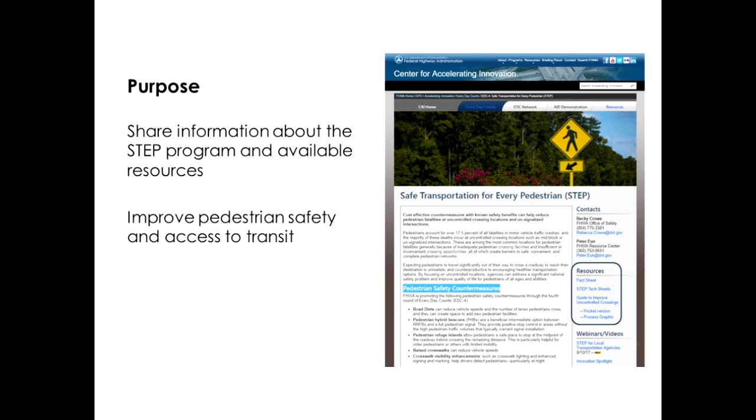All right, and with that, I'm going to go ahead and get started to provide an overview about what we do at the National Aging and Disability Transportation Center. A little bit about the NADTC. We are a technical assistance center, and we're funded by the Federal Transit Administration.

We're co-administered by Easter Seals and the National Association of Area Agencies on Aging. The center was established in 2015, so we've been active for 3 years now. We offer training, resources, and publications. We have a toll-free hotline and information and referral. Our primary audience at NADTC includes older adults, people with disabilities, caregivers, and professionals such as yourself who serve older adults and people with disabilities.

Particular focus areas for us include public and private transportation, ADA accessibility, community livability, pedestrian safety, travel training, and driver transition.

You can find a variety of resources on the NADTC website, which is www.nadtc.org, and we have a number of pedestrian topics. If you go to the website, in the search box you can type in pedestrian, and the type of things that will come up will be our guide on accessible pathways. We have a number of walkability audits and transit assessments, a driver and pedestrian guide. We also have archived Twitter chats that we've done in the past, and I'll talk about that a little bit later in my presentation. And we also have a guide on snow removal and wayfinding.

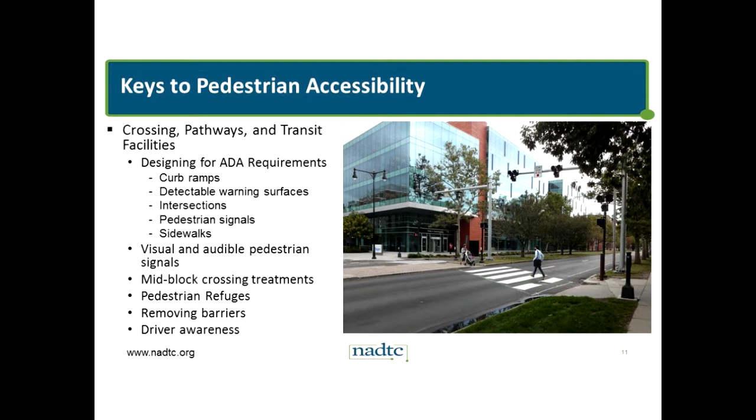All right. When we talk about accessibility, we also want to mention that it goes beyond just the physical infrastructure itself. Pedestrian accessibility decisions, as we know, are typically local in nature, and they need to include inclusive community input from older adults, students, and people with disabilities. Those who regularly use your walking route should be at the table along with the other transportation modes during the public engagement process. Walking assessments and audits are common ways to receive feedback on plans.

So accessibility refers to the entire process that's being used to plan, design, and build physical facilities, not just the ADA features of the facilities themselves. Accessibility decisions may be local, but the conversation is definitely national in scale.

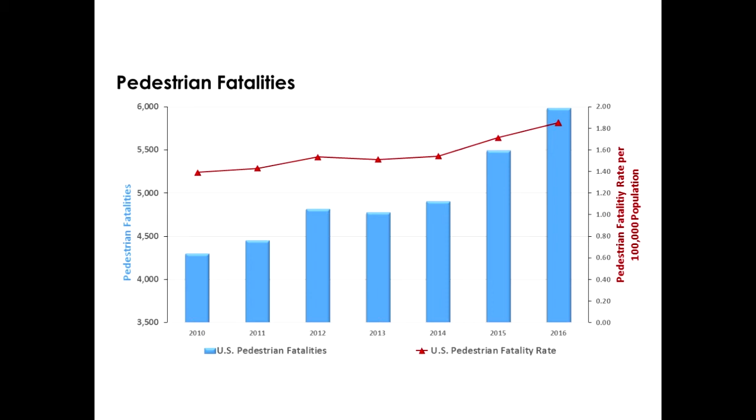As this graph shows, there has been a steady climb in pedestrian fatalities over the past few years, and that's why FHWA has made it a priority through the STEP program.

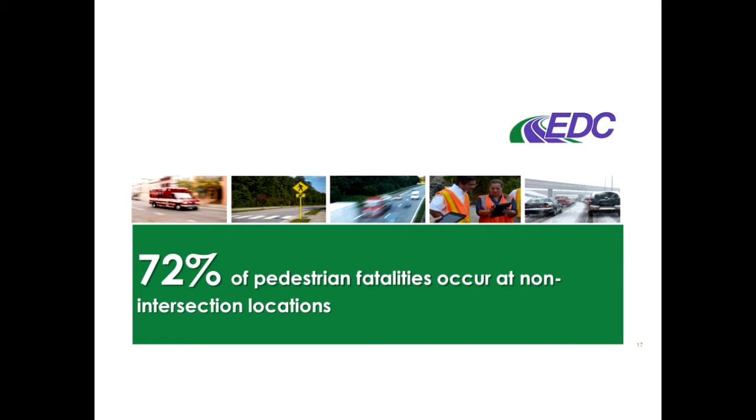72% of pedestrian fatalities occur at non-intersection locations, typically along transit routes. That means mid-block or uncontrolled locations where there are companion bus stops that a transit user is walking to or from at one end of their trip. The STEP program in FHWA is working specifically at non-intersection locations and along transit routes.

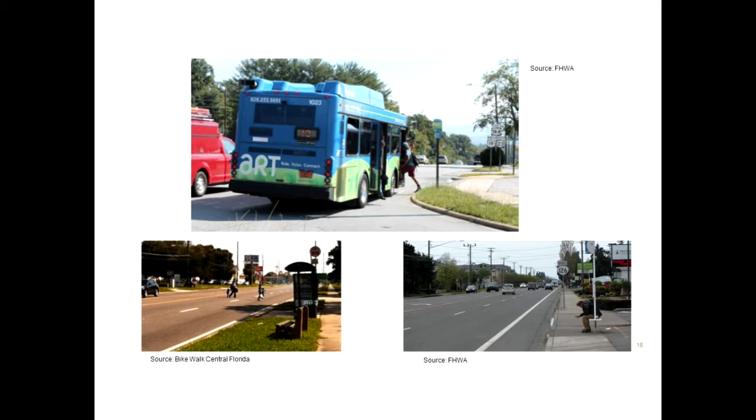That's why this webinar focuses on transit service. These are some examples of bus stop placement that puts pedestrians using the bus at risk. Let's go to the next slide and briefly talk about some of the countermeasures.

These are called the Fabulous 5: crosswalk visibility enhancements, raised crosswalk, pedestrian refuge island, pedestrian hybrid beacon, and road diet. Note there is a 6th one, a rectangular rapid flash beacon, which is making a reappearance.

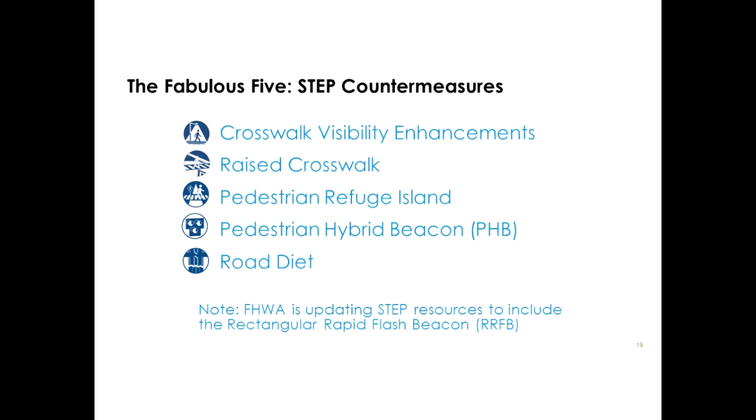I'd like to orient you to the graphic you'll see here, from the technical sheets available on the STEP website. These are conceptual graphics meant to help visualize, but they're not design level, so I want to make that clear. The call-outs for signage are referenced in the Manual on Uniform Traffic Control Devices, the MUTCD.

When using these to get a sense of what you want to do at an uncontrolled crossing, consult the MUTCD as well as any local design guidance or standards. The blue text shows a percentage for crash reduction factors—the percent reduction expected after implementing a given countermeasure at a specific site. For example, installing a centerline rumble strip on a two-lane roadway can reduce crashes by 14%, and 55% specifically for head-on crashes. That's how those crash reduction factors work.

This countermeasure is crosswalk visibility enhancements, shown here as a high visibility crosswalk—striping that's very visible to pedestrians, motorists, and bicyclists, combined with a curb extension. The curb extension brings the curb into the roadway and shortens the crossing distance. It also restricts parking, or more positively, establishes limits on curbside parking to ensure pedestrians are visible to motorists in the crosswalk. That's the first countermeasure.

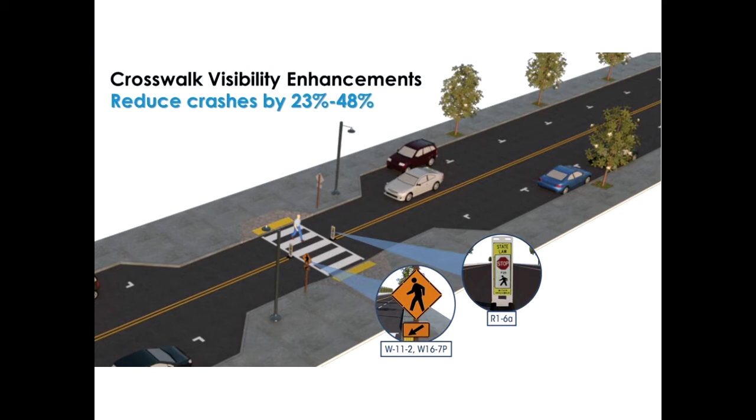The next one is a raised crosswalk, with a crash reduction factor of 45%—a pretty strong measure. This shows the same effective distance as a curb extension, but the raised crosswalk makes pedestrians more visible, and it has the high visibility striping.

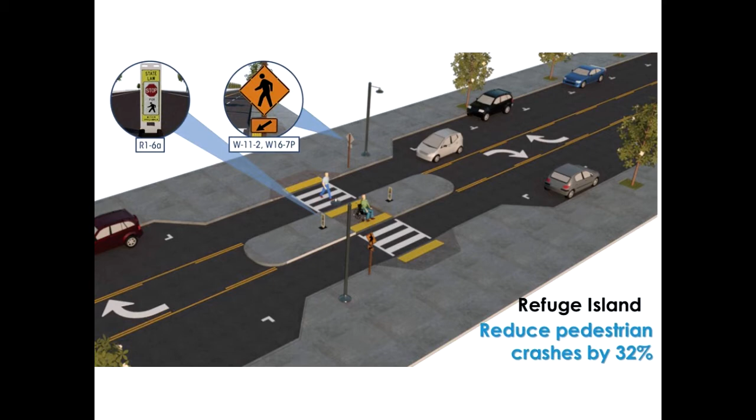The next countermeasure is a refuge island. As you can see, the theme here is shortening crossing distances and making pedestrians more visible. A refuge island, also called a center median, reduces the number of lanes a pedestrian crosses at any given time. This allows the pedestrian to cross one lane, go to the center, and check before crossing another lane, reducing pedestrian crashes by about 32%.

This is our friend, the Hawk signal, now called the pedestrian hybrid beacon. The crash reduction factor here is 55%. I suspect that many of you have recommended the Hawk or have used a Hawk.

It does require motorists to stop when the lights are flashing. There are typically instructions for motorists to know when, because sometimes the light flashes red and sometimes it's a constant red. So the instructions visible to motorists need to be simple, clear, and easy to understand. And this countermeasure uses an advanced stop bar where motorists need to stop behind, to make sure pedestrians are visible and have a clear pathway to cross.

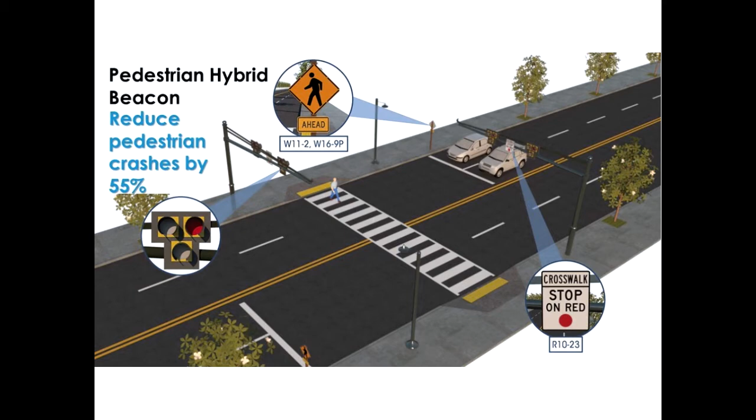Let's go to the next slide, please. This last one is a road diet. It's a change in the roadway that reduces the number of motor vehicle travel lanes, but in most cases it adds bike lanes.

Based on the evaluation of many road diets across the country, we know that all types of crashes go down with road diets. Average travel speeds go down, particularly for motorists, but their travel time along the corridor tends to remain constant. Motorists tend to continue to travel on road-dieted streets, not going through nearby neighborhoods. Pedestrian crashes tend to go down as well, as do bicycle crashes.

One thing I want to point out in these examples: this has a crash reduction factor of between 19 and 47%, so they are very effective.

One thing I want to point out in this example, and it's been in the other examples, is lighting. You'll see that this light is placed before the crosswalk by about 10 feet. It is not directly over the crosswalk or after it, because that tends to make pedestrians using that crosswalk during low light times less visible to approaching motorists.

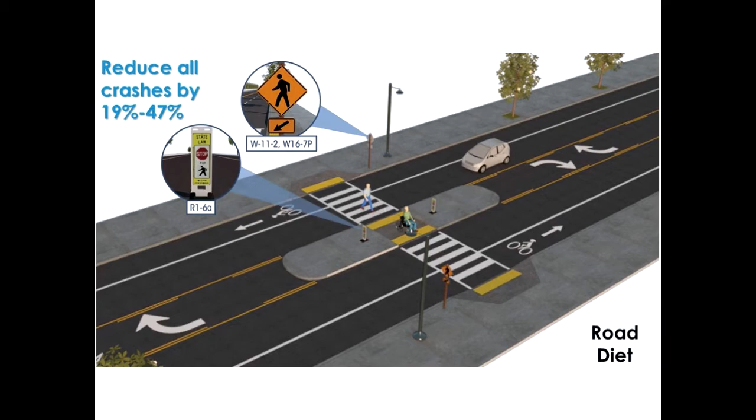So those are the five countermeasures. Next slide, please.

I'd like to also share with you a new guide that FHWA published in January. It's a guide for improving pedestrian safety at uncontrolled locations, based on a six-step process that will help you determine which of these countermeasures or elements of them can be used at a particular crossing location.

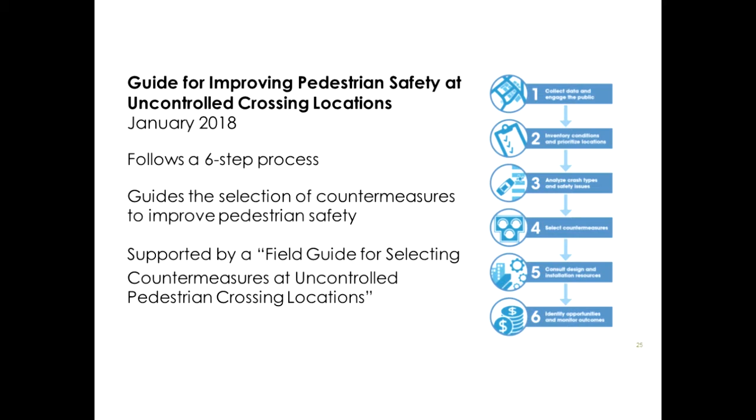It's especially useful to help you when you're working with local and state transportation staff. One of the benefits of having presentations from these three transit agencies is you're going to hear exactly how they do that. Let's go on to the next slide, please.

Importantly, there are three things to think about when you're working with your transportation agency. Is the street a locally owned road or a state-owned road? You want to make sure you're contacting the right person, whether it's a safety engineer or a pedestrian coordinator. You also want to take a look at the crash history.

You want to research crash data and maps, probably try to map those crashes, and if you see that they are along a particular corridor where there are transit stops, take a look to see if they're at formal pedestrian crossings or ones that are uncontrolled.

And then you'll want to create a plan or conduct a field review, and there are different ways to do that, with walk audits and road safety audits and access to transit plans.

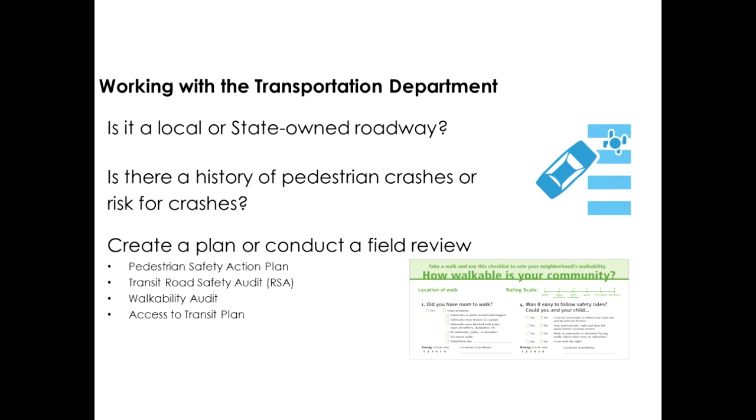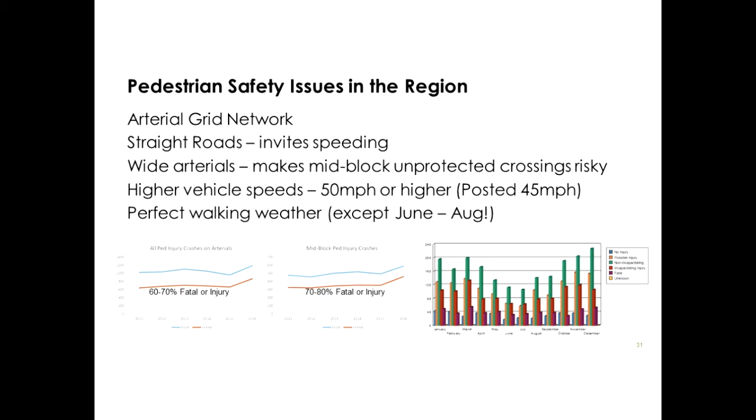Many local communities are now requesting local agencies to install Hawks so that their residents can have safe access to transit and other destinations. For many years, traffic engineering practices both here in Arizona and elsewhere were mostly focused on moving vehicles. Signalized pedestrian crossings were often considered too costly and a hindrance to traffic flow. This is fast changing across the nation, and Hawks may have helped in this direction. However, I'd like to note that the critical link between transit and safe pedestrian access is still not fully addressed.

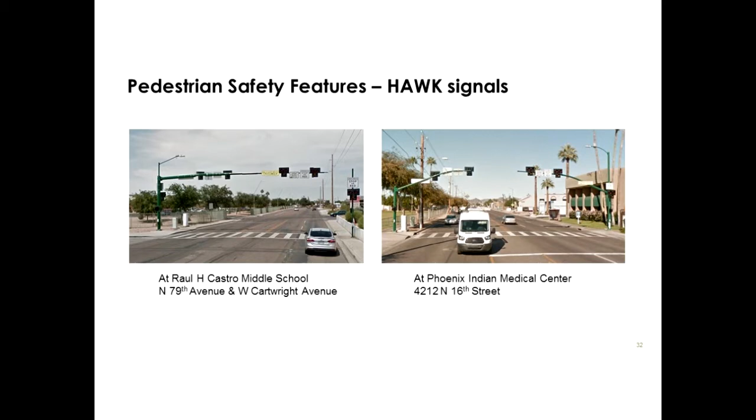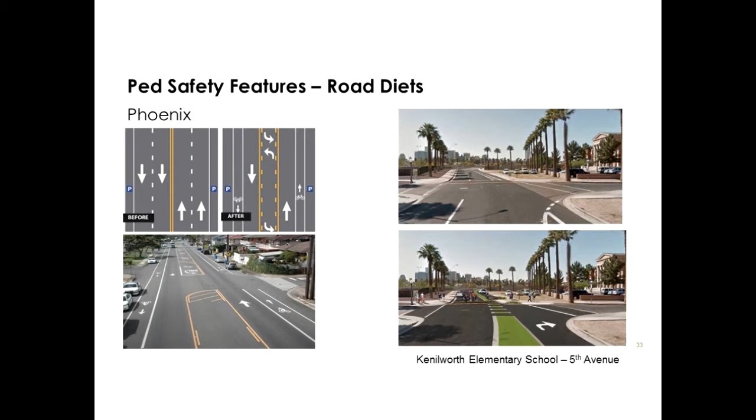This is another example of a road diet in Phoenix, converting a 4-lane road with no median to a 2-lane road with a center 2-way left turn lane and bicycle lanes. Road diets like this have resulted in lowering vehicle speeds and reducing the risk to pedestrians who wish to cross.

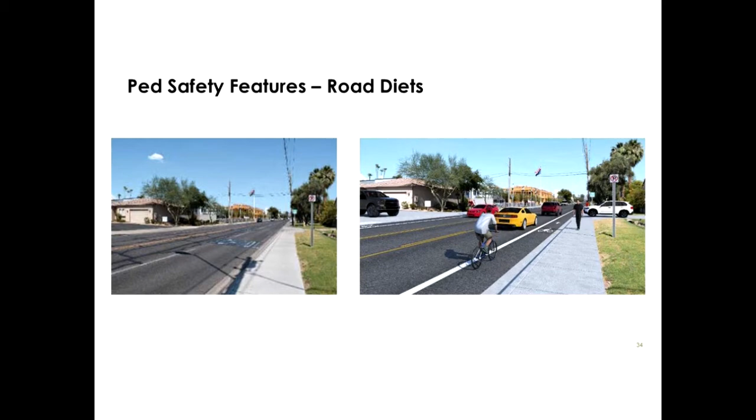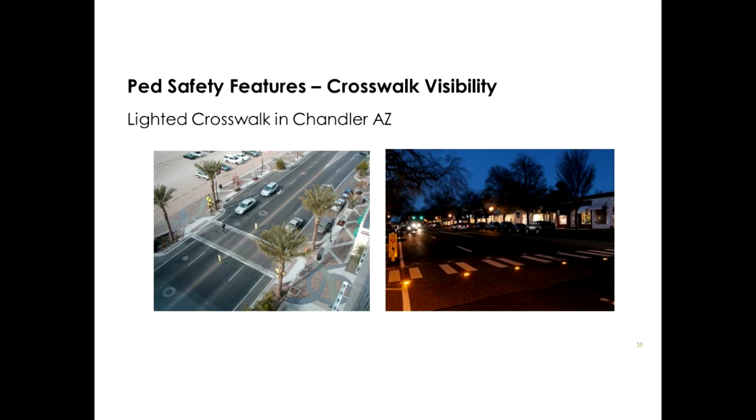A number of local agencies have implemented rectangular rapid flashing beacons at mid-block crossings and have reported positive results regarding improved driver response. Again, many of these crosswalks are in close proximity to transit stops or other pedestrian destinations.

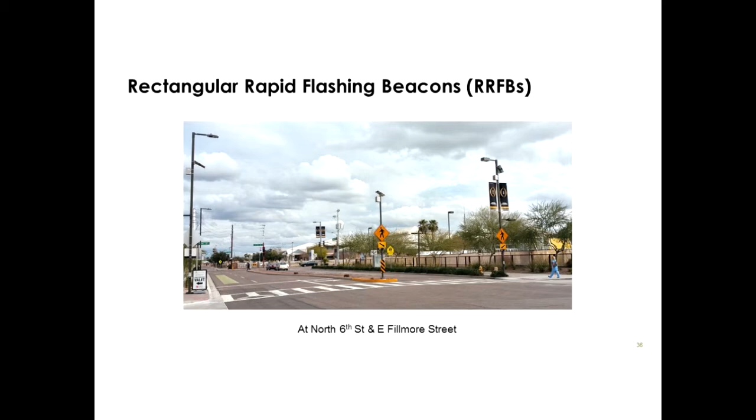The recent allowance of RRFBs was stopped for a little while by Federal Highways, but we understand that they are again allowed for use due to the rolling back of the patent on that. So agencies are free to use them now.

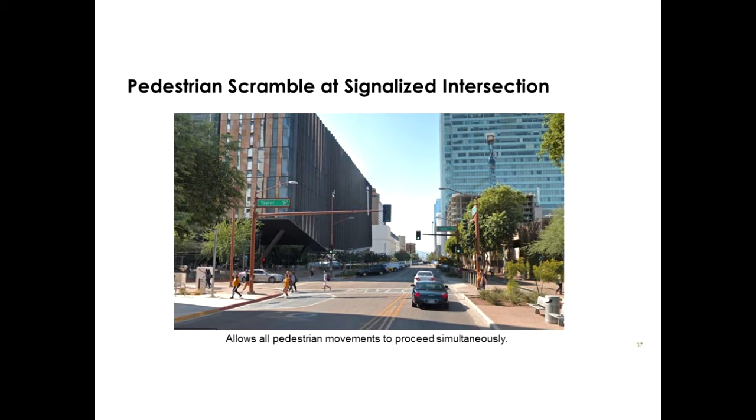Since 2011, we have been performing urban road safety assessments at intersections with locations where there's a record of high crash occurrence. A few years ago, we received a request from our regional transit agency, Valley Metro, to conduct a transit RSA near a light rail station. Since then, we have conducted RSAs at 8 such locations, generating a number of recommendations for safety improvements. Transit RSA recommendations are passed along both to transit agency Valley Metro and to the local city.

The common observation was long pedestrian wait times at the signals, which resulted in a recommendation to increase the walk times. Pedestrian countdown timers and audible pedestrian buttons were also some of the recommendations.

The pictures on this slide were taken by RSA team members to illustrate the general disregard for signals at particular locations with heavy ASU student traffic. The sequence of pictures at the bottom shows students skateboarding right under the gate of an LRT crossing. Risky behavior among youth is a common observation.

However, I must note that the increasing trend of pedestrian deaths and injuries in our region cannot be attributed to risky behavior of the general population.

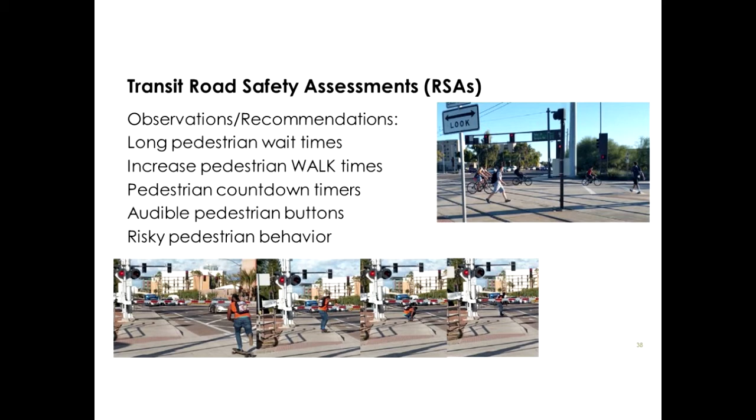Here are two more observations of likely LRT riders crossing at unexpected locations. The RSA team has recommended educational programs to increase awareness among transit users on the risk of such crossings. These observations may also point out the need for better design in the future to accommodate desired movements by pedestrians.

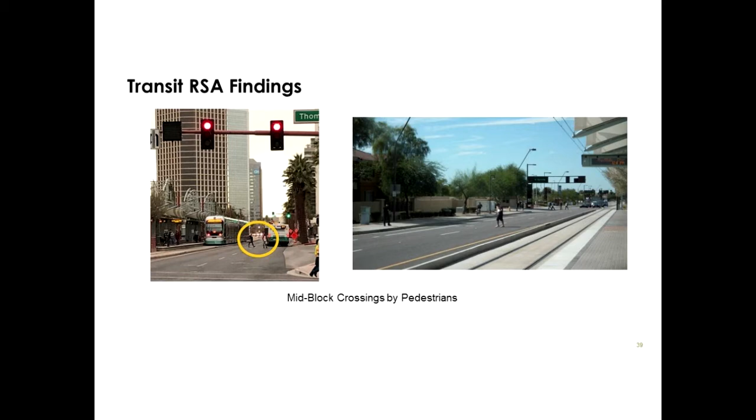The study goal is to identify candidate mid-block locations for pedestrian crossing improvements. As a result of this investigation, we have so far identified 18 candidate sites based on the density of fatal or serious injury crashes and bus stop density along transit routes.

The current condition at each of these locations are either marked or unmarked crossings, or a marked crossing with a pedestrian refuge. We are currently developing a regional safety project application to compete for federal HSIP funds in fiscal year 21 and 22 for installing HAWK signals at each of these locations.

That concludes my part of the presentation, and my colleague Jay Yanarick will continue from here. Thank you.

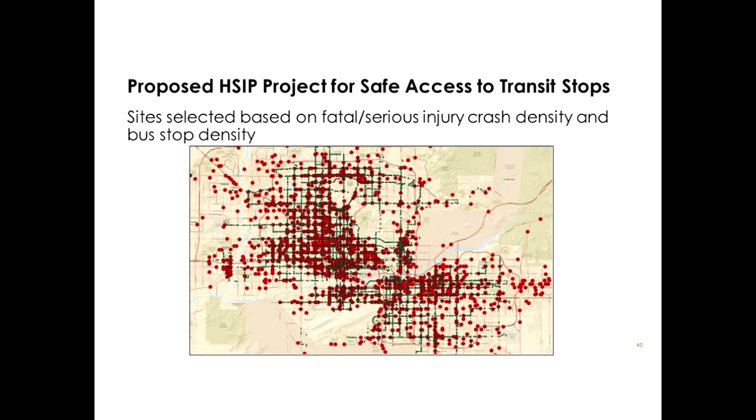Thank you, Dr. Joshua. Dr. Joshua showed you a couple pictures of our light rail system. Our light rail system has over 150 intersections, or over 200 intersections now. We're about 26 miles long, and so we've really grown since 2008, and we've continued to have unique situations where we need to have pedestrians cross our line.

For the most part, our intersections are where we do the crossing. So we have traditional signalized intersections, and then we have pedestrian-only crossings. We do that downtown for high pedestrian areas like at ASU, like Dr. Joshua was talking about.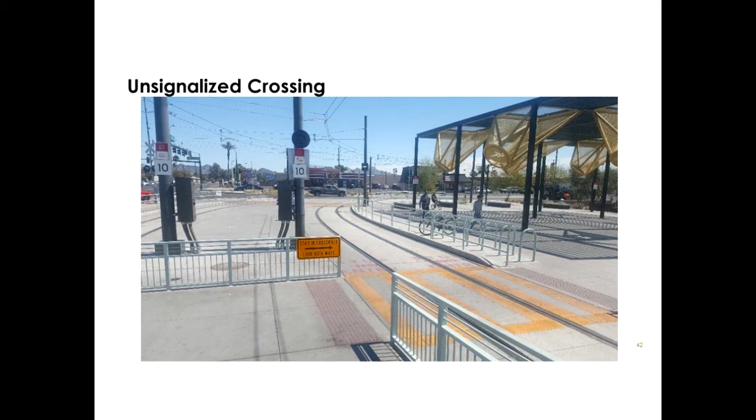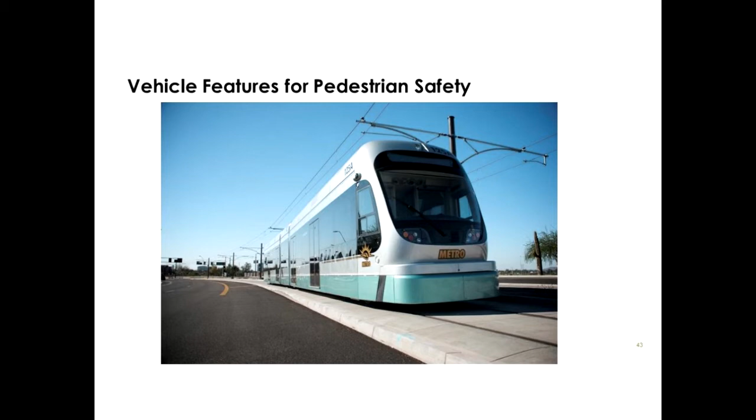Also, we are the transit agency, and we control the vehicle. This is probably one of the most unique features of our system. This bumper that you see right there moves pedestrians out of the way when they are in conflict with us. We have not had any head-on fatalities with pedestrians on our light rail system. We have had it in other places on the bus system, but not with light rail because of this bumper. This bumper also works well with regular vehicles, but it also does well with pedestrians. So I encourage any transit agency out there to look into that.

So of course we always have special events in downtown Phoenix. We use police and we try to channelize the best we can.

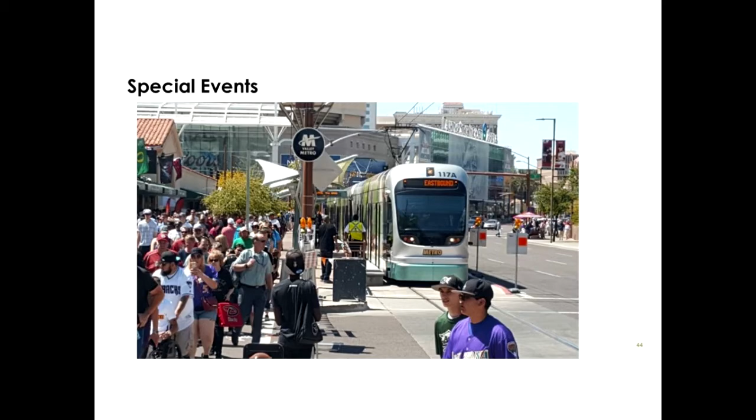So this was Super Bowl 49. It was very crazy. What we did there, we had to use channelization and barriers. We also used police and all the staff that we had available. I actually worked that platform one night to help control the traffic, the amount of pedestrians that we had. It was a unique experience.

Next, I want to talk about a roundabout that we're planning. It's actually under construction right now. We've designed it, and it's fairly unique in that we're going to have an unsignalized crossing. One of the things we did, you can look in the upper left-hand corner—our attempt was to slow the vehicles coming into the roundabout and into the area where the pedestrian would first cross.

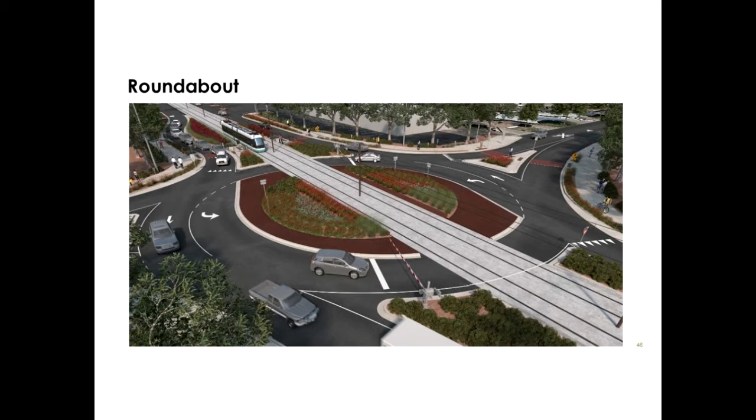So what we're going to use is a Z crossing. You can find a standard Z crossing in the MUTCD. One of the things we're going to do is put in-ground flashers for the pedestrians. When the train is coming—because most people are looking down these days, they're all on their iPhones, on their devices—they're not really paying attention. So our goal is to make the pedestrians aware of when a train is coming by actually flashing at them from the ground level.

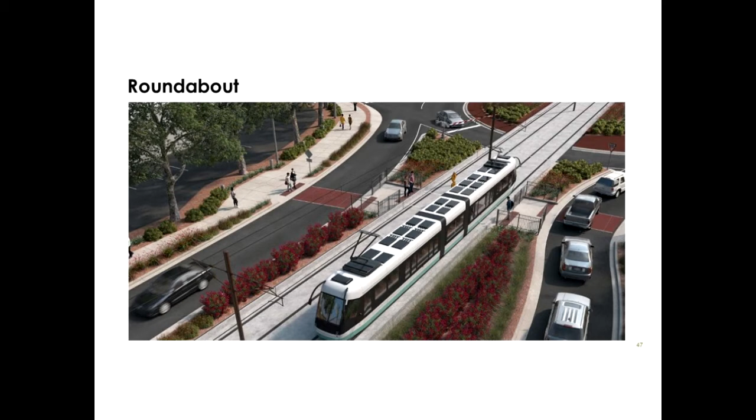Additionally, we have other mitigations in place in case we need to go to full gates there. We're putting in extra conduits and have the potential to put in gates should we need that. We look forward to seeing what happens with this intersection once it gets activated. And with that, I thank you all.

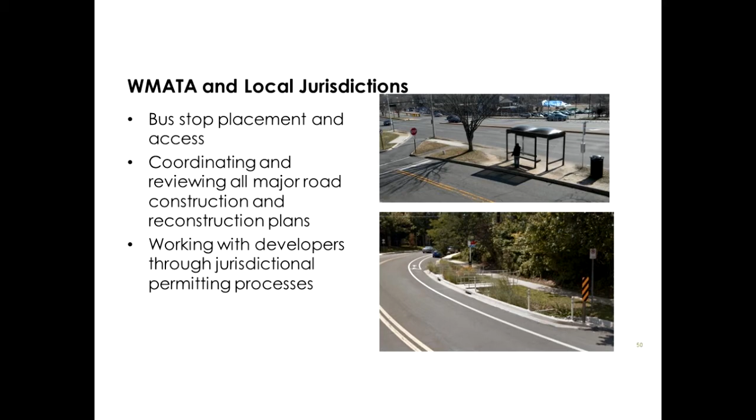So the scope of our accessibility and safety challenge is enormous. Out of about 11,000 bus stops that we have in our service area, more than half do not meet ADA compliance, and nearly all of them are on rights-of-way that Metro doesn't own or control. At each bus stop, what we own is the pole, the flag—you can see that in the picture there with one of our jurisdictional partners' flags alongside ours—and the information attached to the pole, like a schedule or route map.

We did receive a federal grant several years ago to improve ADA access at a bunch of stops, but coordinating construction on facilities that are not owned by us has been a really difficult issue, and we've had a lot of challenges working with right-of-way owners. So we really depend on the right-of-way owners to construct the improvements and comply with ADA in almost every case. Estimates we've collected show it would take over $100 million to improve all of the stops in the region to our standards and make them ADA compliant. So we've done a lot of work.

Montgomery County, which is a local county, has done about $25 million worth of work just in their own county alone. So we're continuing to work at it, but the problem is still large.

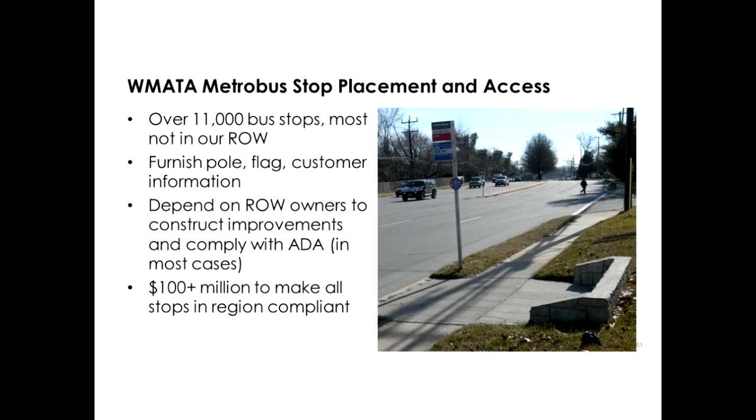So a little bit about our guidelines. The ADA has certain requirements, which many of you are probably familiar with, but we also realized that in order to serve our customers properly, Metro needed to go further than the ADA does. In 2014, we added a policy statement criteria about bus stops, and it requires that not only is there a level landing pad and infrastructure at the stop, but that there's a curb cut nearby the stop with a receiving curb cut at a crossing. So in order for us to consider the stop accessible for our own purposes, we do require that there have to be those curb cuts and crossings.

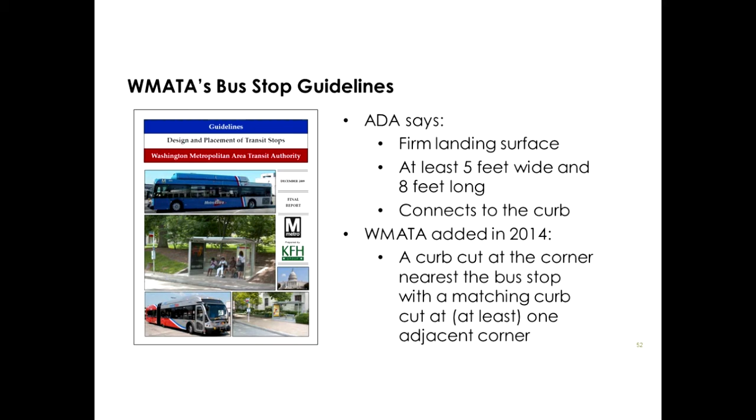Every year we get dozens of roadway corridor plans, big sets of plans sent to our office that describe improvements to the right-of-way where our buses operate. We've done a pretty good job of ensuring our jurisdictional leads and designers understand the needs of bus stops, bus operations, and bus customers, but we often have to do a fair amount of hand-holding to get the plans to a workable place. So it's a combination of looking at things and reviewing, but we'd like to educate people ahead of time as much as we can so that the plans coming in the door are acceptable.

Several years ago, we did decide as Metro that no new bus stops were going to be added to the system if they weren't compliant with ADA and our standards. So that's a way for us to hold the line on noncompliant and unacceptable bus stop plans and roadway construction that doesn't meet the needs of our customers and pedestrians getting on and off the bus.

Particularly in DC, the District of Columbia, the local governments have been extremely supportive of our working with developers to improve access and amenities at bus stops adjacent to new buildings and properties. So if that's an available option anywhere, I encourage everybody to take advantage of that through your jurisdiction. Developers are coming in and they want the roadside, the curbside to look nice. They want good access to their new development. So if there's a way to leverage that review process, we've had a lot of success with that.

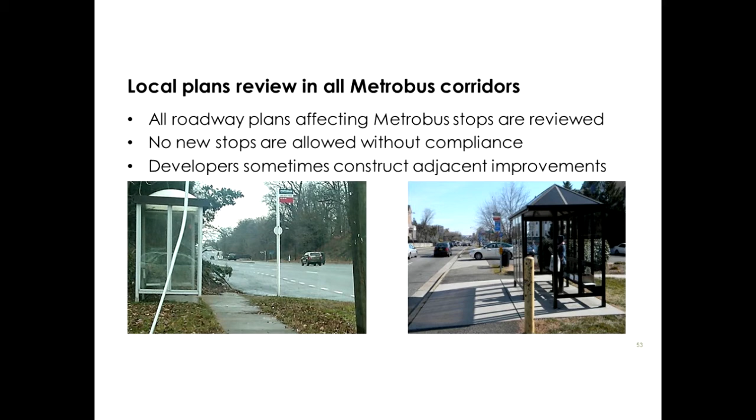All right, so our case study that I'd like to talk about is an example of a lot of things you've seen already that Carol went over and the folks from Phoenix went over. The roadway corridor is called Ager Road. It's 1.28 miles long, a $12 million project. Finding ways to get access to these bus stops without doing major construction is very difficult.

The project purpose is to essentially do two travel lanes in each direction, bicycle lanes in each direction, some parallel parking, sidewalks where they're not existing today, and some buffers. There's a lot of stormwater work associated with this project. You can see there's a stream that runs right through the middle of it, so stormwater management is a major part of this project. As far as transit, giving spaces for buses to stay in the roadway, places for customers to board and get off buses, and we have worked very closely with the county on the whole project.

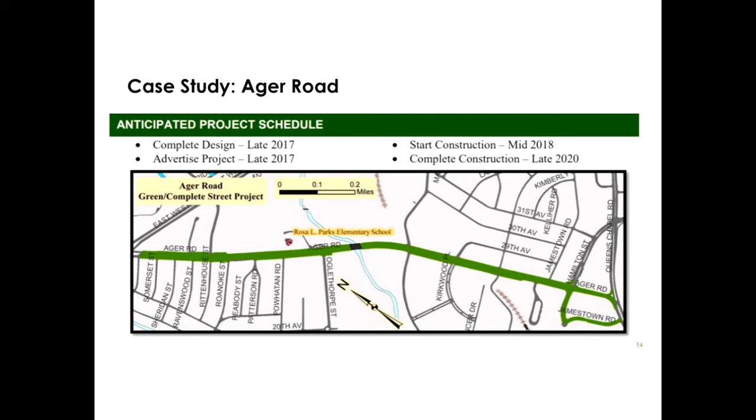So if we could look at the next slide, we can get into a little bit more detail. One of the things we looked at in this project was stop consolidation. There are a few stops that were either not very well used or that were in locations hard to design safely. So we did look at a couple stops in the corridor, taking them out completely and focusing investments and improvements on stops that remain.

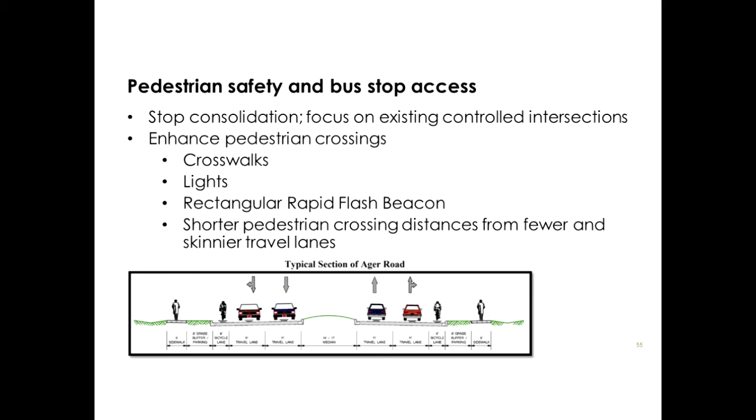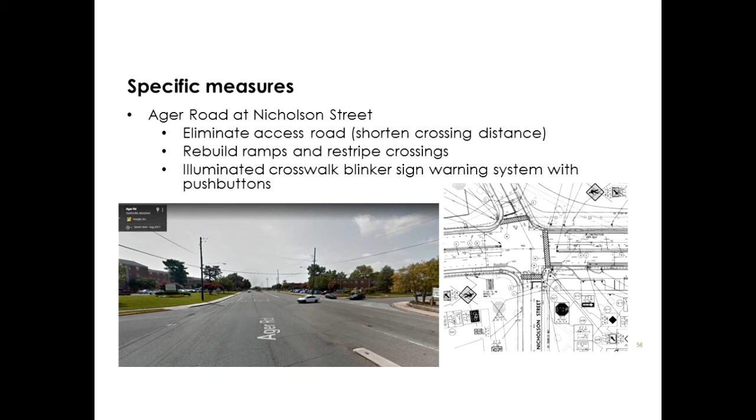Anybody getting on and off the bus here has to navigate a really difficult condition in order to be safe. The picture on the right is a snapshot of the improvements that are coming. You can see that the crosswalks are going to be improved with a rectangular rapid flash beacon, shorter crossings by getting rid of these slip lanes and access lanes, and high visibility crosswalks on 3 of the 4 approaches of the intersection. This really changes it from a place that's almost no man's land from a pedestrian standpoint, nice to drive on but really hard to walk on, to a place that's easier to walk, easier to navigate, and easier to get on and off buses, using this corridor as a complete street. That's all I have today, and I'll be happy to answer any questions later in the presentation. Thank you very much.

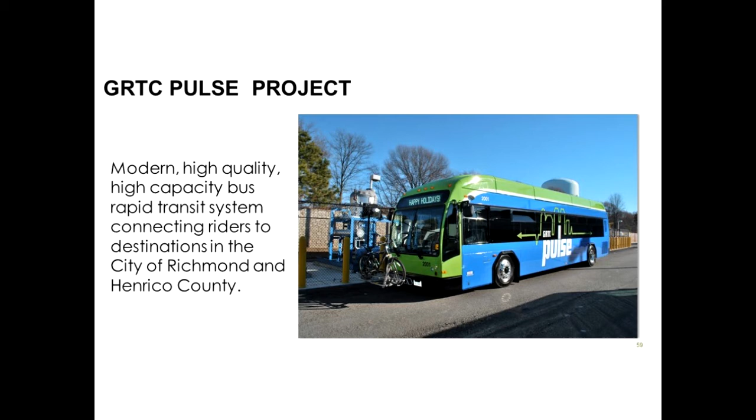The reason there's no fare box on the bus is because at the station we actually have off-board fare collection, with ticket vending machines at every station location along the Pulse corridor. Another feature of the Pulse project is frequency of service. The bus will arrive every 10 minutes on peak - that's 6 a.m. to 9 a.m. and 4 p.m. to 7 p.m. - with rapid, frequent service every 10 minutes. Off peak, the bus will arrive every 15 minutes. The Pulse route is 7.6 miles in length, and of that, there are 3.2 miles of dedicated bus-only lanes.

The bus will be operating along the median running lane as well as along the curb side of Broad and Main Streets. At 53 intersections along the Pulse corridor, we have transit signal priority technology. Each bus has technology that allows it to communicate with the traffic lights. So when it's about to enter an intersection that's about to change to yellow, the light will actually stay green longer for the bus to travel through safely. And at a red light, the bus will get a preemptive start on traffic as well.

Also for our project, we have 14 station locations - 5 median locations and 9 curbside. In total, we have 26 station platforms. There's 1 station at each terminus point, at Willow Lawn and Rocketts Landing. And for all the stations in between, there's both an eastbound and westbound platform.

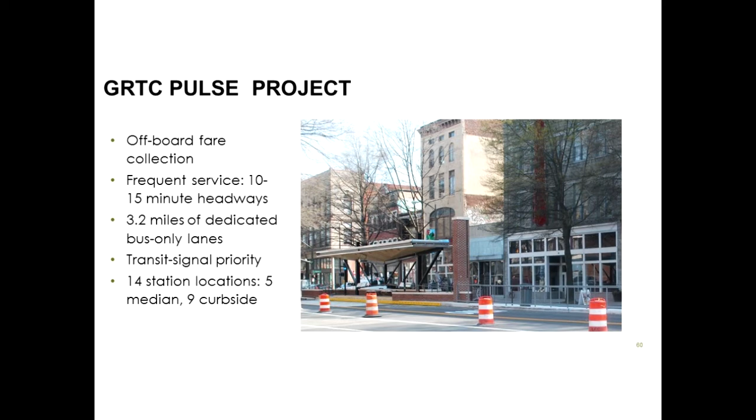Before I get into more detail of this project, I just want to go over some design principles. This was created in collaboration with our Policy Advisory Committee, PAC, as well as our Technical Advisory Committee, and these were our guiding principles used in the design of the project.

First off, safety and use for all. That includes not only pedestrians, but bicyclists as well as vehicles. We want to make sure that the corridor was safe for everyone.

North-south connectivity and access. As you'll see later in this presentation, we've closed up some areas along the corridor just to make sure it was safe for all users, while still maintaining that north-south connectivity.

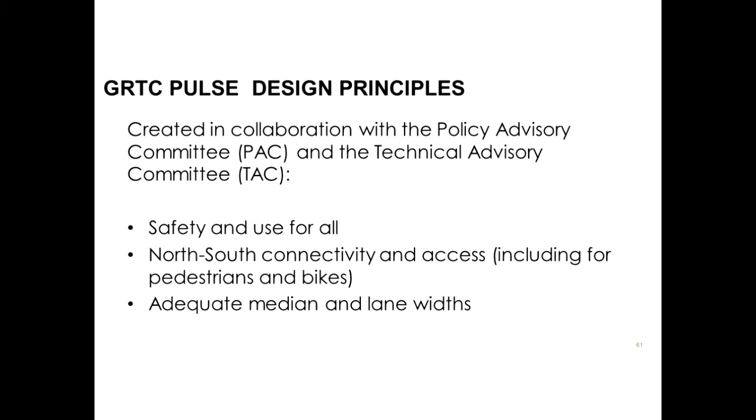Finally, adequate median and lane width. The city of Richmond is a historic city, and our travel lanes are quite narrow, especially on Broad and Main Streets. So in designing the pulse, we had to make sure the lanes were wide enough to accommodate the buses. In some parts of the corridor, we had to shave down the median to ensure the bus had an 11-foot wide lane so it could operate comfortably down the corridor.

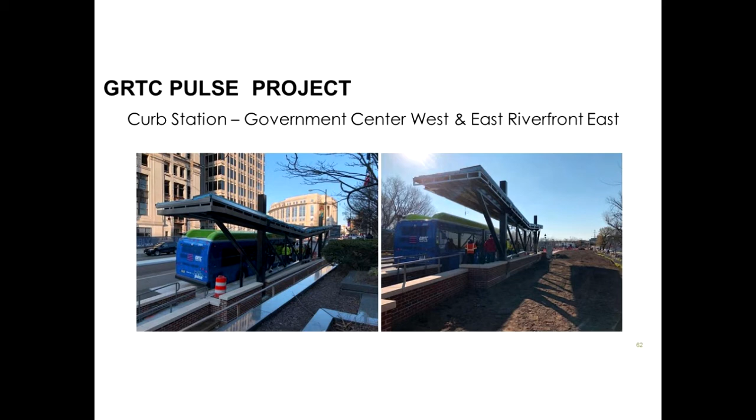Here are two examples of our curb-running stations. The picture on the left is our Government Center West station, right in front of City Hall, showing buses docked in front of the station platform during an outreach event we had about a month ago. The picture on the right shows our East Riverfront East station location, the future home of the Stone Brewery Beer Garden as well as the East Riverfront project the City of Richmond is doing. These are great opportunities and great locations for our stops.

Here we have our median-running station, where we'll get more in depth about the pedestrian safety measures we've put in place along the corridor. I just want to point out some design features of the station. As I mentioned, Richmond is a historic city and we're quite proud of our history, so we want to incorporate that into the design of our station. You can see the heavy steel truss as well as the brickwork, which can be found at our old train shed, now located at the Science Museum of Virginia.

If you look to the right of that picture, it almost blends into the background, but you can see our totem pole that will have the station name on it. It will also have a light that rises to indicate when the bus approaches, for pedestrians as well as users of the pulse.

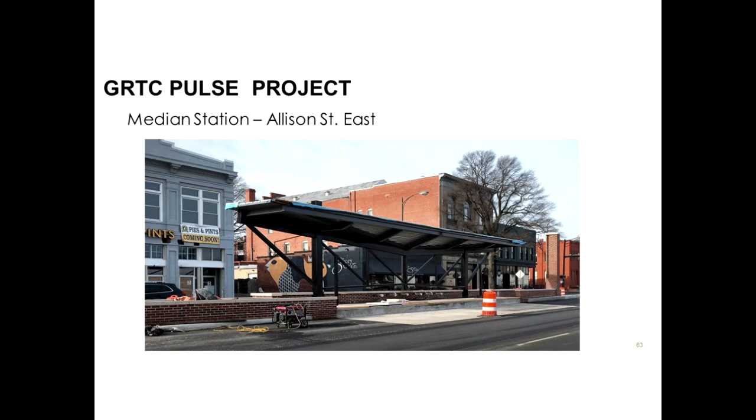This is at Allison, the same location as our previous slide. In this instance, if this gentleman was crossing the street to access the station, he would be accessing our Allison West station location. This picture is in front of a Richmond landmark, Lee's Chicken — we have a love for Lee's Chicken in the city of Richmond. The pedestrian crosswalk here is a transverse crosswalk, and as Aaron mentioned in his presentation, our crosswalk is also faded, which is a real problem.

If you notice behind the gentleman crossing the street, you can see our curb ramp right there, and the pedestrian crosswalk curves to meet that ramp. It's right in front of that brick wall as well as the signage indicating Lee's Chicken. This is at a signalized intersection, by the way.

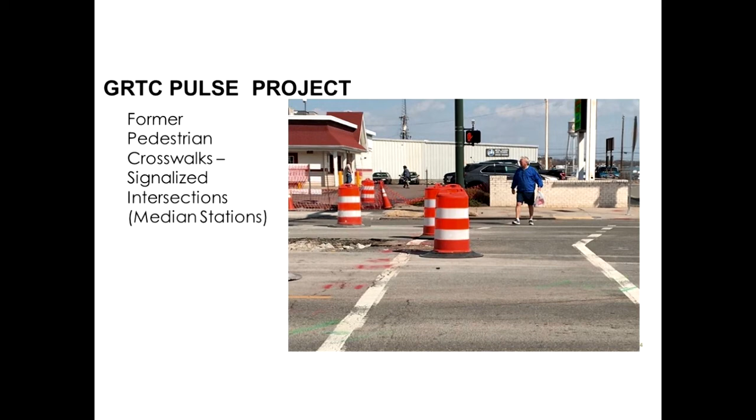Now here is the pedestrian crosswalk after we completed the station. I'm happy to report we now have a ladder pedestrian crosswalk, centered with the station itself. Previously, as we saw on the earlier slide, the curb ramp was located toward that brick wall and signage. Now it's directly in front of Lee's Chicken, so people have direct access to chicken from now on if they're trying to get to and from or across Broad Street.

Right here you can see that there's a signal pole. You can see in the background of that picture as well, and they'll have pedestrian push buttons, and we'll see that later on in the slide. This is a high visibility area of the corridor, so we want to make sure we have that ladder pedestrian crosswalk as well.

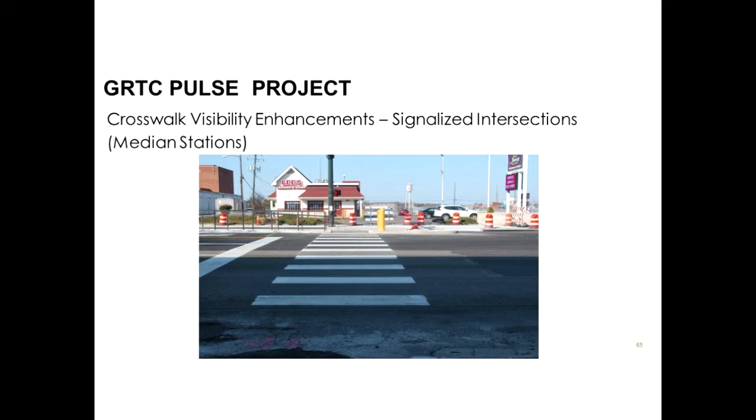Here is our VCU and VUU station location, in the heart of Virginia Commonwealth University Station. In this area of the corridor there's a lot of heavy pedestrian traffic. As you can see, I took this picture. We had some people deciding to use the crosswalk and stand on the pedestrian refuge, as well as people who decide to disregard the crosswalk even though they're right next to it.

So right here, once again, the ladder crosswalk is aligned with the curb ramp. We also have the handrails to protect pedestrians from any oncoming traffic as they're boarding the station platform. That lady right there is clearly watching to make sure no cars are crossing, and once again, this is at a signalized intersection. All of our median stations are located at signalized intersections because we want to make sure that there is that safe pedestrian crossing where we can monitor and maintain activity throughout the area.

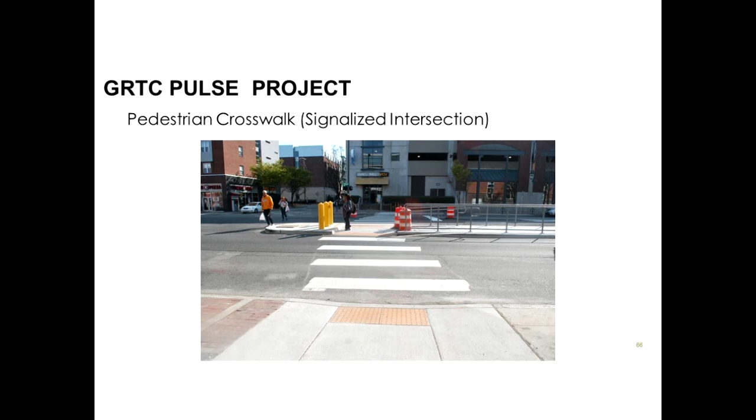Here's a closer look at that station platform. This is actually at the eastbound one. Here we have a 6-foot pedestrian refuge. The gentleman on the right is standing on that tactile warning strip, as you've seen in our previous slides. That's to warn people that they're about to enter into oncoming traffic, just that reminder.

Also, we have those bollards there to protect people from vehicular traffic, as well as that median nose there to protect people as well. We chose this carefully in the design of the Pulse to make sure that we try to protect all users of the corridor, including pedestrians as well as bicyclists. In this picture you can see a closer look at that handrail leading up to the station platform.

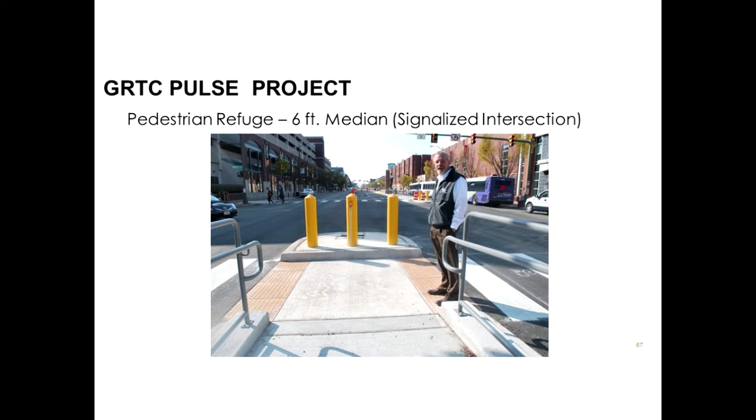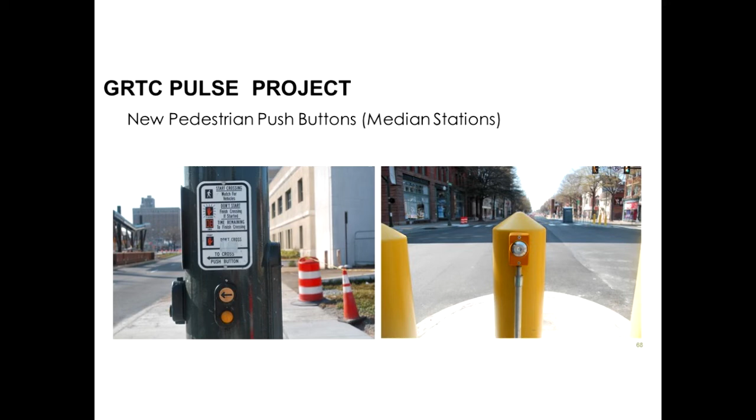So in designing the Pulse, we knew that things like this would happen. So we made sure that even in the landscaped area of the platform, that we would have a pedestrian refuge as well.

And that is also 6 feet wide to accommodate those people who disregard these safe pedestrian areas that we have created along the corridor for those very reasons.

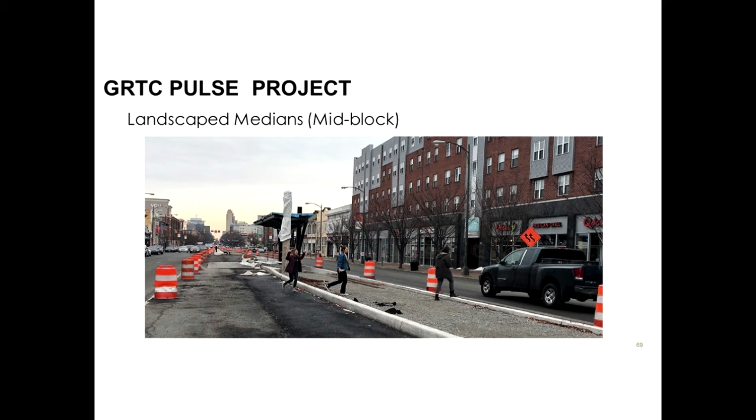So essentially, if you were traveling eastbound Broad Street, and I can tell you from my own personal experience, it has happened countless times, you'll be driving along, listening to your radio, and all of a sudden someone in front of you will slam on their brakes to try to make that northbound turn into Jackson Ward. That's the neighborhood located off the north of Broad Street.

It was quite dangerous, I can tell you, and I probably avoided many accidents because of intersections like that. Because of things like this, the project partners were very clear on making sure that the corridor was safe for all users, as one of our guiding principles, as I mentioned earlier in this presentation.

So we closed the median. People could no longer turn here. I would also like to add that I have spoken to businesses located on the south side of this very intersection, and there have been at least 2 incidents where cars traveling across this intersection have actually crashed into the storefront. So adding this median has actually made this corridor a lot safer for even people who are working along the corridor as well.

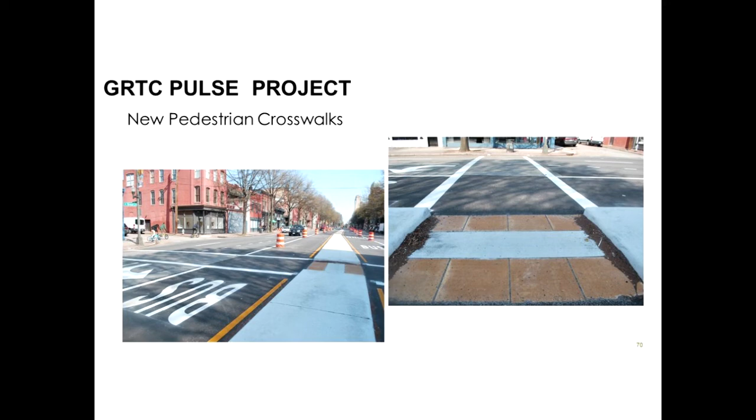And it's our hope that as we continue with the Pulse and once we launch this summer, that people will continue to abide by these safe pedestrian measures that we've put in place along the corridor.